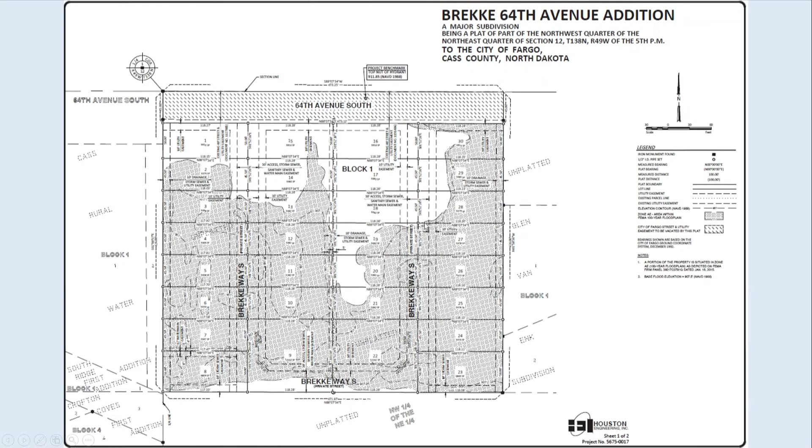Again, there'll be 30 lots. The difference of having a private access easement is you see the lot lines come to the middle of the access easement, so the access easement is actually part of all these lots. This is something that all these individual lots share, and everything in that 30-foot wide access and utility easement is managed and maintained by the subdivision.

It is not a city street. The city does not own the utilities; everything is theirs. One of the things we've been working with the applicant on is there are actually several layers of documentation dealing with this. The applicant, Mr. Brekke, has been working with us to prepare covenants, as a homeowners association would have, regarding the maintenance and ownership of those utilities and the surface of that road.

From the city side, the city's not part of the covenants, we just want to make sure things are covered in the covenants. The city has, as we often do for subdivisions, an amenities plan, and engineering prepares a developer agreement that also goes before the city commission as a recorded document covering the city's considerations regarding the subdivision. So that's all privately owned. The utilities come off 64th Avenue South here, but they'll be privately owned utilities.

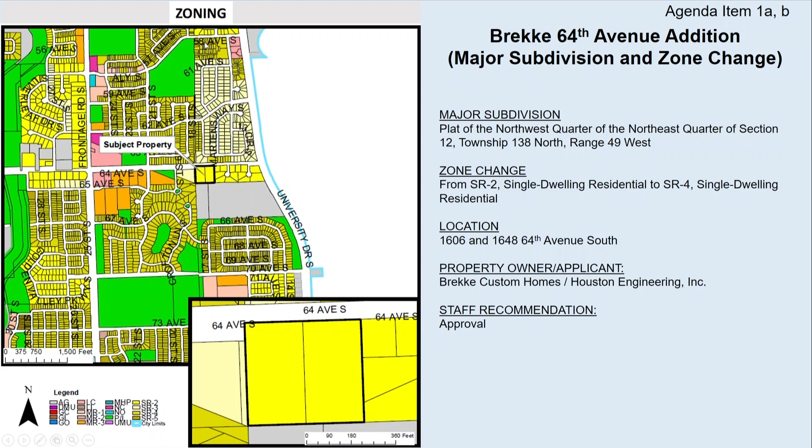Is there anything similar density in that area? Yes. You may be familiar with this, it's called Sundance Square up here. Have you ever been up here? I'll tell you what, if you let me manipulate my PowerPoint for a minute, I brought a slide for you. Look at that, Donald. Yeah, you pay me to be prepared.

So this is 58th Avenue South and University Drive South. This is actually two subdivisions combined here, done in 2001, 2003. There's 43 units on 6.85 acres, so it's about 6.2 dwelling units per acre. Our density on the proposed project is about 6.5 dwelling units per acre. These are different because these houses are all attached, and the lot sizes vary here, from 4,400 to 7,500. In the proposed subdivision, they're a little more consistent.

They're all in the 5,300s. There's a couple big ones on the end. So it's a little different layout, and here this is laid out differently. This lot is actually this street is actually a separate lot, which we don't do anymore. I'm going to just turn to Mr. Williams. Mark, did you have any other additional comments on this one? Okay, Mark was around when this happened.

These are private streets here then, so this is also managed by the HOA or? Yes, sir. Yes, ma'am, that's correct. Yeah, these are private streets, and this has been around for some time.

Again, mostly attached here. Interestingly, if you look, this is a nice contrast here. So here, all the lots are individually owned. Here, there are multiple residences too, but it's apparently been condominiumized, so that's all on one single lot. These lots are all on one single lot. So that would be an option if the applicant wanted to do it on his property here, is to combine those two lots into one and just have a giant condo. But he had elected to make individual lots, and he can talk more about that as well.

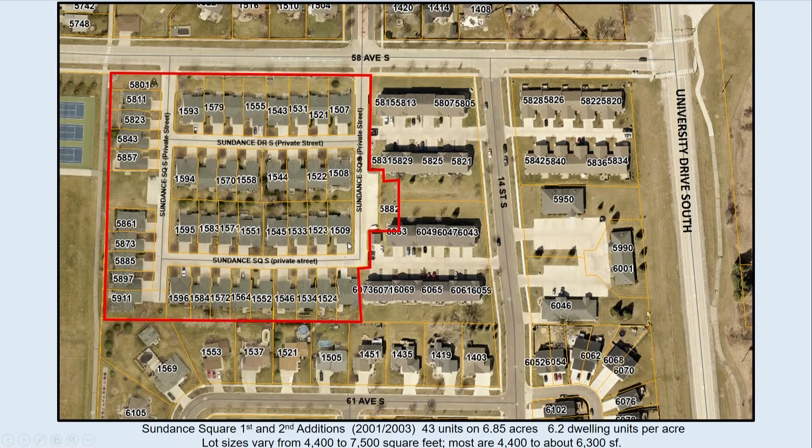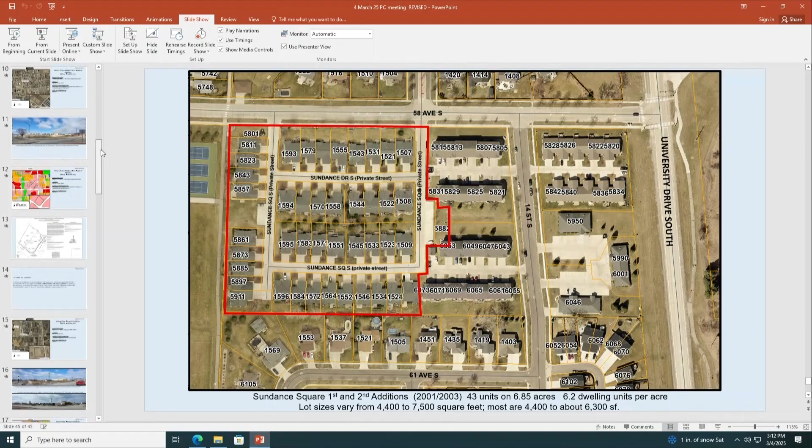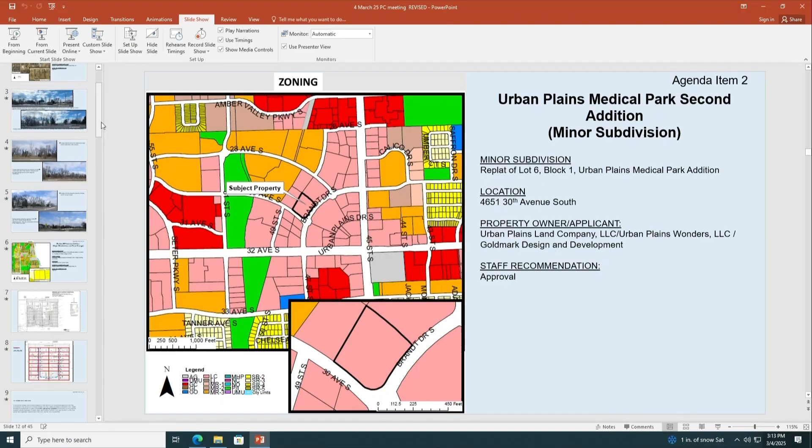Okay, thank you. There's also another project similar to this called Gates of Madison Square that is off of 25th Street and 37th Avenue South. It's a similar layout to this. That was actually created before the current LDC, so I didn't count that one because it's similar, but it's not under the current LDC. Thanks, Donald. Any other questions?

Related to sidewalks, we pride ourselves in trying to move toward making walkable neighborhoods, all kinds of stuff. All of a sudden, you're going to have a very dense area with likely a lot of children in there, and no sidewalks. But was there any discussion with the developer about availability of sidewalks? We did talk about that. I think the developer can comment on that some more, sir, when it is before you. And we did look at that. They just weren't included in this proposal for the subdivision.

I was just going to ask, regarding public comments and everything on this, was there any discussion during your process about going with SR3 zoning instead of SR4 to reduce some of that density? I don't recall there was such a discussion, sir. Okay.

Any other questions for Donald? Donald, do they have any connection on the south side of Brekke Way into the shared use path to the south? Would there be any direct connection? Let me get the map here for you, sir. Hang on. So you mean they connect down to this park here?

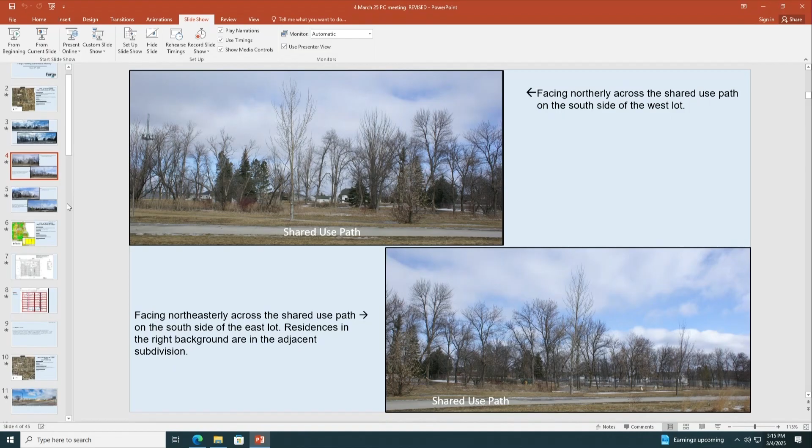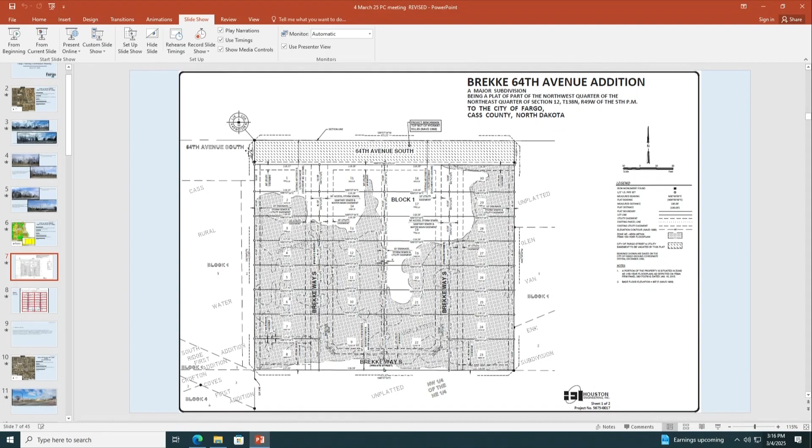So you see, this is the shared use path here, and that wraps around the back. I find it unfortunate that there doesn't seem to be any connection to that shared use path. If I'm reading this correctly, it looks like between lots 7 and 8 there's an easement that would be a place to connect this development to the shared use path to the south. Perhaps so. Obviously they could also just connect off the public sidewalk, but that's outside of the actual subdivision. There's also across 64th a pedestrian refuge island in the middle, with a marked crosswalk there for that path, continuing northward for some distance up.

Maybe what I'll do is ask the applicant up and then you guys can ask questions on what their thoughts were there. Unless any more questions for... one question for Donald.

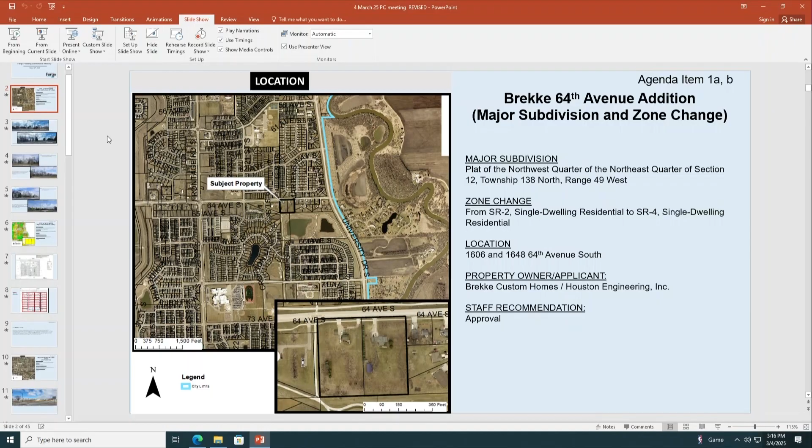So the verbiage on the maintenance, like snow removal, that will be approved by the city in terms of responsibility and accountability to make sure that's properly taken care of? Yes, they don't approve the applicant's covenants. But the developer agreement, I believe— Mr. Board, will you address that? Yeah, it's on the bottom of page 2, it talks about that agreement and what states in there. Okay, so the developer agreement will address that from the city side. Perfect, thank you, Commissioners.

Any other questions for Donald before I invite the applicant up? I had just one — we're adding 2 additional access points to the property. Are these all within regulation for additional access points? Looks like there's a house directly to the right, to the east on the map. This is going to cause additional traffic, with all these access points off a major arterial roadway, 64th. That's not an issue, and there was no variance granted for that. For this situation these are existing — there are 2 driveways there now, so they're not really adding access, although obviously the intensity of the access will be greater once the development is made. Mr. Borboom, that's all right to have that? Okay, yeah, okay. Thank you for asking, sir.

Any other questions? Let's go ahead and invite Mr. Brian Pattengale up. Good afternoon, Commissioners. Brian Pattengale from Houston Engineering.

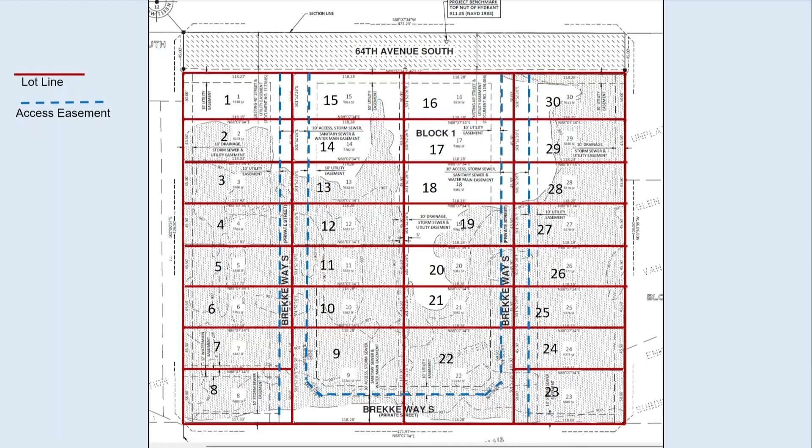You could even potentially narrow lots 8 and 23 a bit to provide a little more of a landscape buffer. I appreciate it, and I love trees. It's hard when we're trying to also do the right thing for flood protection and so forth, so I certainly understand some of the fundamentals of why that's challenging and can appreciate that.

And I'm grateful to hear that the drainage is being considered on the adjacent properties, because that's meaningful. The last thing we want to do is create a new development and then harm the existing people that have been there for decades. So I would hope there could be a much more in-depth dialogue about the opportunities with the sidewalk conversation. That's a really important conversation point. Thank you.

I just wanted to bring up one point. You guys are concerned about connecting to that walking path, but if it connects to this community, there's no sidewalk to connect to it. You also can't park anything on the street. There's no parking. So what's the point of connecting to that path if they can't park near the entryway, or they're going to have to walk down the street to connect to it? So we'd have people walking in the street to get to that path. Does that make sense? I don't know if that's the right way to look at it, but if the biggest concern is connecting the paths, there's no sidewalks, there's no parking.

I've got two points, and Commissioner Jordan already pointed out a possible landscape buffer. I'm looking at an aerial on my phone, and it does look like there is one. Donald, can you bring that up? There's kind of a natural landscape buffer anyway from the start of the path to the south, to that south property line, which I think Mr. Pattengale said is about 60 feet. That includes some trees on the park side of that property line that would remain. So there is that landscape buffer.

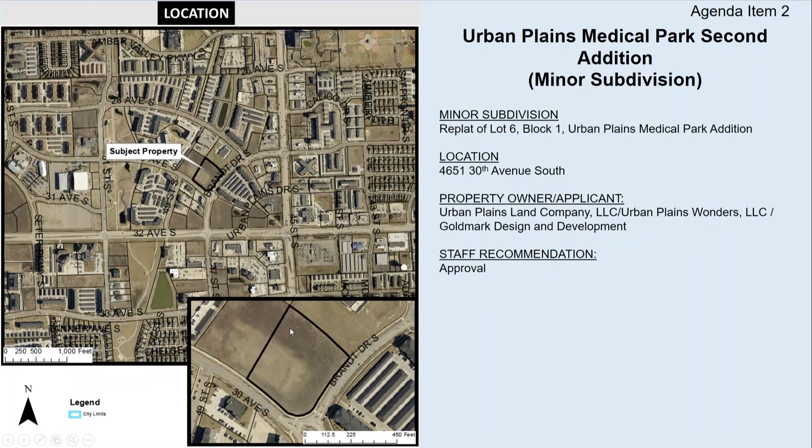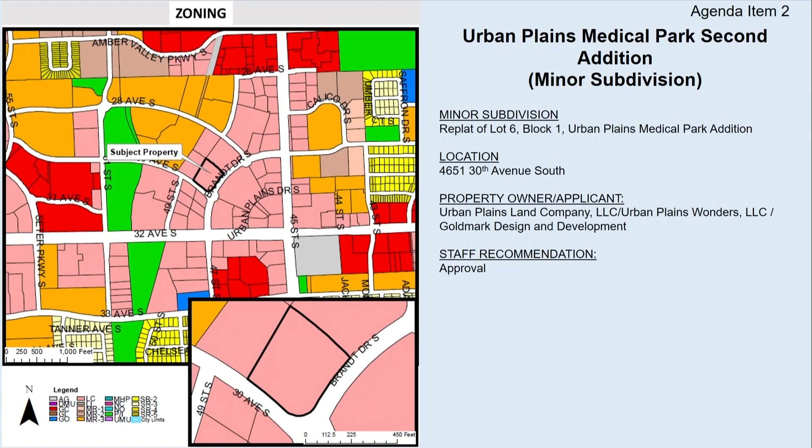Subdivision fairly straightforward here, just dividing a lot more or less in half. The only other thing the subdivision does is provide for a break in the negative access easement. Just to refresh the commissioners, the negative access easement is an imaginary line that prohibits access directly from the street, because we want to control access. But the applicant has proposed a break here in the access easement, a 36-foot wide break.

Staff has reviewed it and found that acceptable to have there. So they'll have shared access for the lots here. This is already in place by an existing easement. And then they'll have access here off Brandt Drive South.

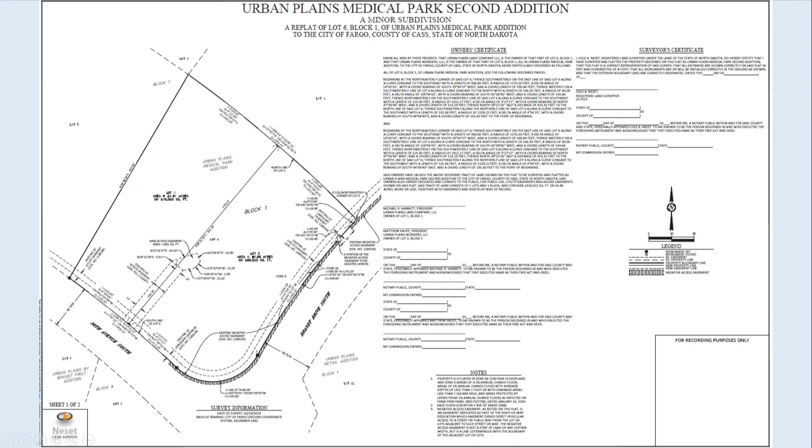So pretty straightforward. The applicant, Nate Volmuth of Goldmark Design and Development, is with us this afternoon. There he is, may wish to address the commission. The staff's recommendation is stated in the staff report and shown on the screens. That concludes staff's presentation for Urban Plains Medical Park, Second Addition.

Thanks, Donald. Commissioners, any questions for Donald? Seeing none, do you want to add anything? Thank you, commissioners. Any questions you have, feel free. Other than that, I don't have anything to add. Any questions for Mr. Volmuth?

Thank you. Let's go ahead and open up public hearing. Anybody wish to speak on this item? Seeing none, we'll close public hearing.

Commissioners? Do I have a motion? Make the motion to approve per staff's recommendation. Second. Motion and a second. Any discussion? Seeing none, Miranda, go ahead and take the roll.

Rosenberg, aye. Betlock, aye. Haas, aye. Cecil, aye. Mose, aye. Glide, aye. Schmidt, aye. Georgie, aye. Stoffren, aye. Tossa, aye. Motion carries. Thank you, commissioners.

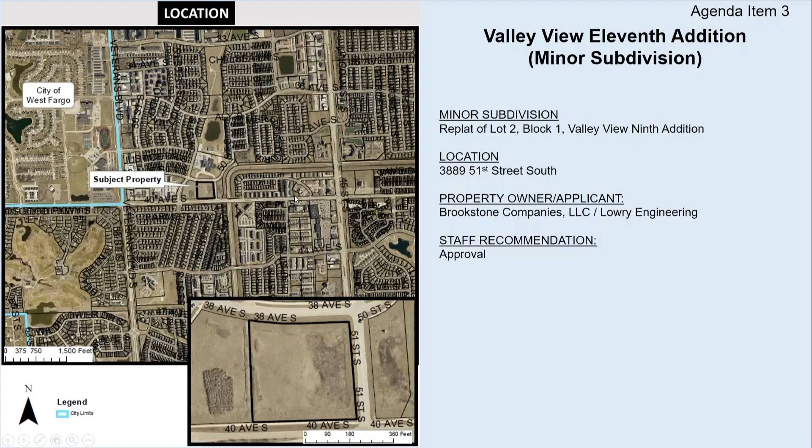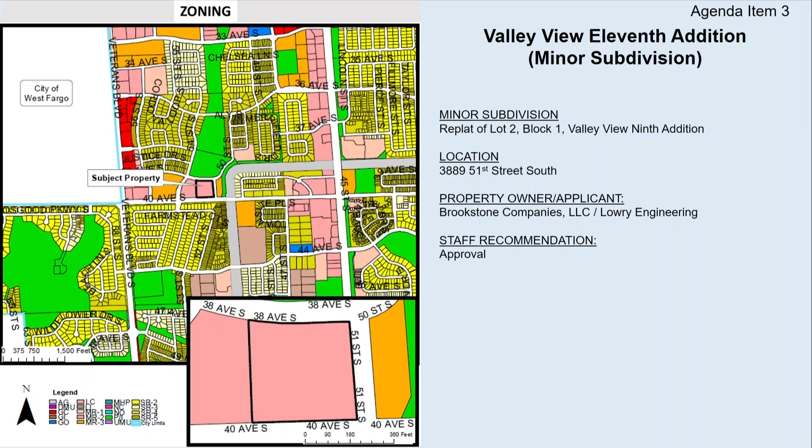The property is zoned LC, limited commercial, with a conditional overlay. No zone change is proposed, and the conditional overlay will carry through with this subdivision. The applicant is requesting a minor subdivision, a replat of Lot 2, Block 1, Valley View 9th Addition, to be entitled Valley View 11th Addition. The subdivision will consist of 2 lots, 1 block.

There is a shared pond easement in the center, as well as shared utility and storm easements on the west side and in the center, as well as a proposed negative access easement on the southern side of 51st Street. There are existing 10-foot utility easements along the northeast-south property lines and an existing negative access easement along 40th Avenue South. The negative access easements will prohibit vehicle access from 40th Avenue and part of 51st Street.

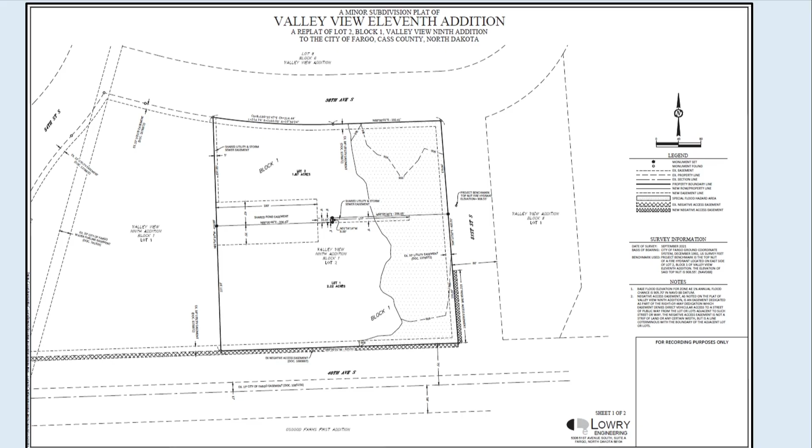To date, staff have received 2 inquiries regarding the property, one of which came today, with no noted concern. Staff's recommendation is for approval as stated in the staff report and on your screen. Andrew Thill with Lowry Engineering is here if you have any questions for him. Thank you, commissioners, that concludes staff's presentation.

Thanks, Chelsea. Commissioners, any questions for Chelsea? No questions, letting you off easy. Applicant have anything to add? Just state your name for the record, please. I am Andrew Thill with Lowry Engineering. I'm here to answer questions. I do not have anything else to add. Any questions for the applicant, commissioners?

No questions. Thank you. Let's go ahead and open up public hearing. Anybody wish to speak on this item? Seeing none, let's go ahead and close the public hearing. Commissioners? I move to approve the motion of the staff report. Second. Motion and second. Any discussion?

Go ahead and take the roll, Miranda. Glide, aye. Schmidt, aye. Hess, aye. Stoffren, aye. Mose, aye. Georgie, aye. Rosenberg, aye. Betlock, aye. Cecil, aye. Tassa, aye. Motion carried. Other items. Thanks, Chelsea.

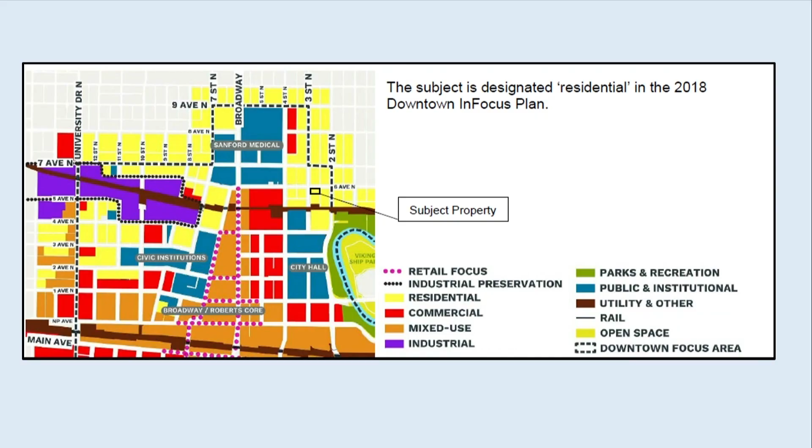So I'll go through the first one, which is Lennon Lofts. It's located just north of downtown. One thing I look at when we're working with developers is whether it's really consistent with the long-term land use plan. You can see the subject property is within the downtown, and it's in an area identified as future residential. In terms of existing conditions, we have 2 buildings.

Both are vacant. You can see on the house the boarded-up windows on the second floor. This building and the 6-unit apartment building had a fire, I think a little over 4 years ago, and it's been vacant since that time. The owner at the time of the fire sold it to another developer who's been looking at how to make this feasible for some additional housing near downtown.

Just some closer pictures—you can see the blighted conditions, obviously where there's a burned-out apartment on the 3rd floor. I think the building's about 100 years old. Didn't know they had that style then, but at least according to assessor's records.

So the future redevelopment—again, this would be a 3-story building, parking on the main floor, 22 apartments. This particular plan has not yet been reviewed by planning; they'll also go through the regular site plan review process. There's a downtown mixed-use zoning district that regulates building materials, requires some transparency on the main floor, and in the downtown there's no setbacks or real limitations on density.

I guess we didn't have all the plans in there, but happy to answer any questions on this particular renewal plan. So the recommended motion is to recommend to the city commission that this renewal plan is consistent with your plan. Again, it's zoned downtown mixed use, and it shows in the land use plan it's consistent with that residential designation. Happy to answer any questions.

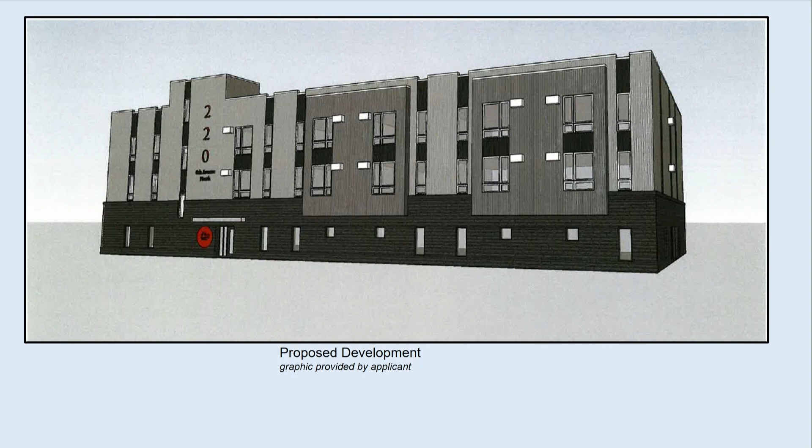Jim, since the TIF is just for taking down the property and cleaning it up, right? Because they obviously haven't come through planning or improvement of this building that they have—is that what happens? So if this TIF gets approved, it's to remove all the property, clean the site up, and have it ready for build then?

It's probably 3 things. One, it helps reduce the cost of the land because they're buying buildings here that have some value, although not much—so it writes down the cost of that building to the land value. Secondly, as you mentioned, the demolition, there's some administration. But then the only public facilities really related to this are pulling out the existing sewers and redoing the sidewalks on the street. The TIF is just attached to this project, not the building—whatever the building is will be a different discussion going forward.

Right, because is it contingent on this building being built, or is it contingent that they're going to have some kind of building built? It's contingent on this particular 22-unit building that would be outlined in the renewal plan.

Is that how we do all the TIFs that way? Yeah, they're all a little different. These two are single parcel TIFs. We've had some that are more area-wide. Those become more complex with multiple activities.

This is just a single TIF, and I'll get into probably more detail than you want, but this is also in the Renaissance Zone, so there's a Renaissance Zone application. What the developer is requesting is really pending approval of the 5-year in the Renaissance Zone. There would be another 5-year TIF, which would just act as another property tax exemption, running for 5 years.

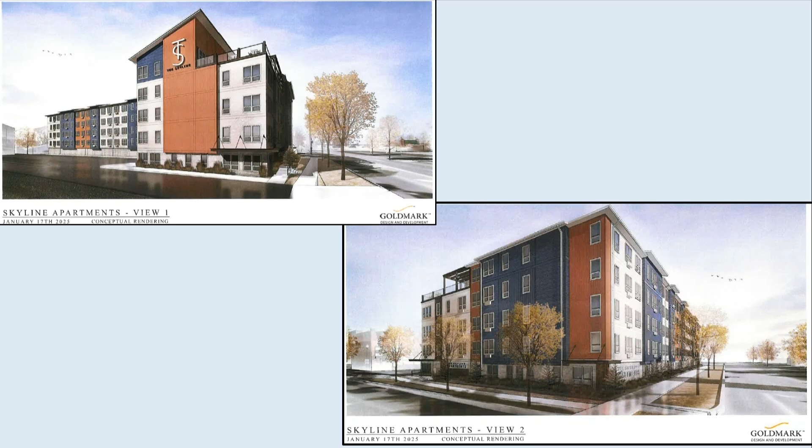This is the proposed apartment building. It would be a 5-story building with main floor parking, again allowed by the University Mixed Use zoning district.

The top left picture is kind of looking to the west. You can see there's an amenity up here where you can probably get a nice view of the campus, and this is the view towards the alley. There'll be, in addition to the interior parking, surface parking. This is an area looking towards the campus, or actually this is an area looking up 18th Street towards 12th Avenue and 18.

Again, I think this is consistent with the GO 2030 comprehensive plan. We're trying to get more housing that would be kind of student oriented. Again, this is market rate housing.

And so the recommendation is to find that this is consistent with the GO 2030 plan. Like the previous application, the TIF assistance goes toward demolition, land costs, and public facilities, which is primarily utilities and the public right of way. Happy to answer any questions.

Thanks, Jim. Questions for Jim? I lived in one of those houses in 1992, and it needed to be demoed then. So what's taking you so long? Thank you.